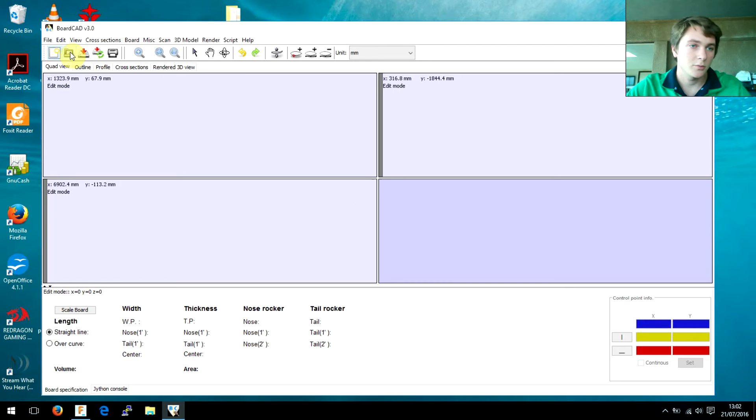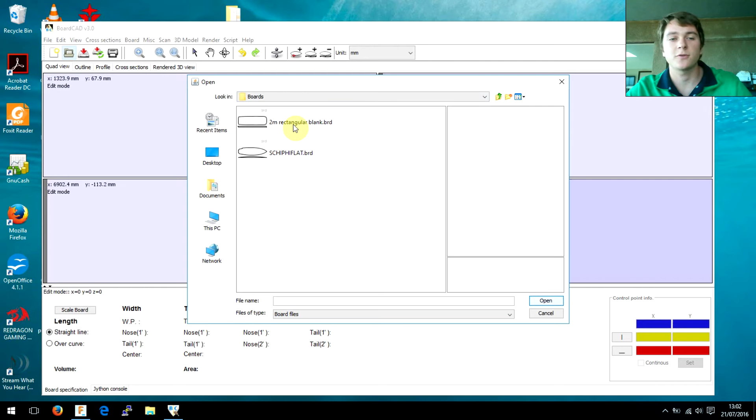Alright, so here I've already created my board, but if you want to create a new one, you could just choose a template, so I'm just going to open mine. Now take note of the open dialog, it's already gone to my boards folder. If in that folder that you're going to has a board file which is supposed to be compatible but not exactly compatible, for instance the Shape3D boards with a fin box wouldn't open in Boardcad. Also, if there's a corrupted file, it would also freeze the open dialog, or an old Boardcad file or a new Boardcad file. It's quite sensitive to which files you have in your directory, otherwise the open dialog freezes up.

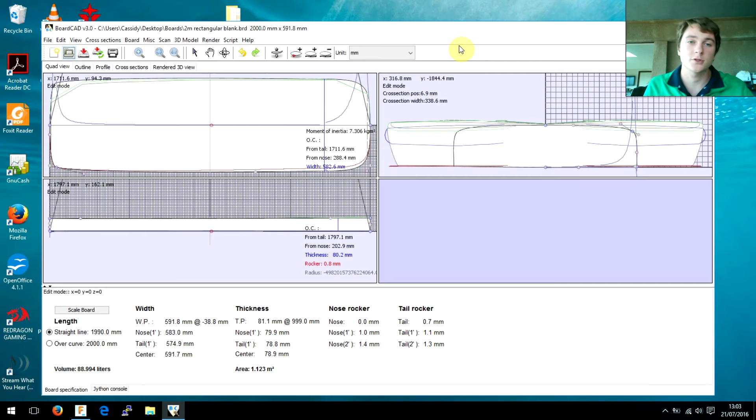Alright, so let's open up our blank. There we go, alright cool. So from here, the first thing we've got to do whenever we import a board is to go to 3D model and create 3D model using Bezier patches. If you've imported a model and it's not looking quite the same as it did last time you did it, it's most likely because the 3D model was not converted using Bezier patches. Alright, so now once it's all shaded, what we're going to do is we're going to render it as a NURBS model. There we go, I believe that's rendered as NURBS.

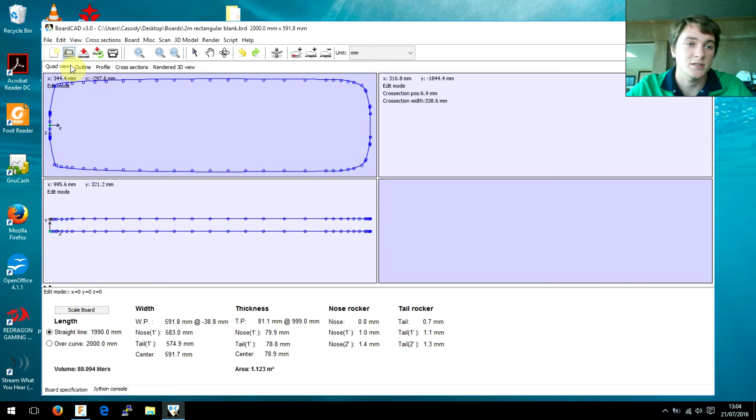Alright, so now we have our blank inside and we need to set it as a blank. So we'll go to 3D model, choose set as blank, and then of course it's very important to right click, view blank. Now if this line is not blue, your board has not been converted to a blank successfully. So now that you've converted it to a blank, we can actually go and import our board file that we want to CNC. So I'll go open, I'll open this board. Just a little bit of background on how the boards are cut that I'm doing is we're cutting it out of just a flat rectangular square blank of extruded polystyrene.

So what we do is we flatten the board out, or design it in a flattened way, and then we press it into its own rocker. Also, our blanks do not have any stringers, which makes the cutting process a little bit simpler.

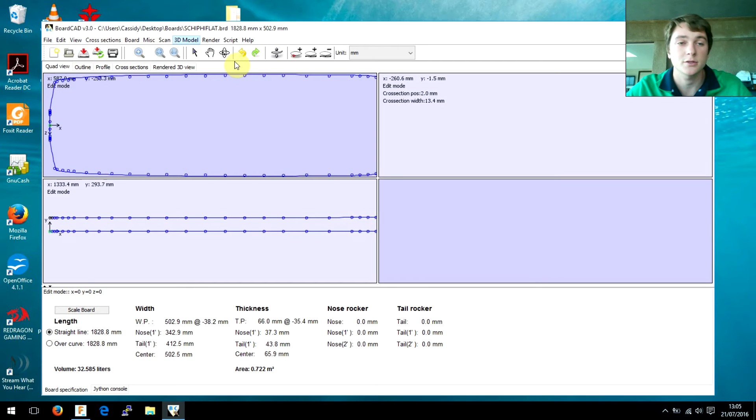Alright, so I imported the board, but you can't see it, so that's a little bit misleading. The reason why we can't see it is because it has not been created into a 3D model using Bezier patches. Once we convert it to a 3D model with Bezier patches, if the block is indented or highlighted, it means the program is loading, taking its time to process the board. There we go, our board's in.

Brilliant. So now we need to shift our board a little bit in the blank so it seems more reasonable. What we'll do is translate X, which is the length of the board. Let's make it 25 millimeters. There we go, you can see the whole board is shifted that way. It takes a while to respond in this window.

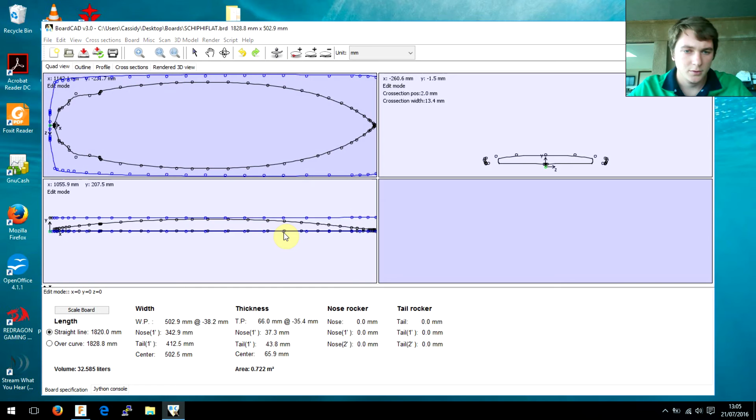And then of course we want to shift it up a little bit higher in this block. So we'll go to 3D model, translate Y. Y is the thickness of the board in the modeling. Shift it 5 millimeters. Oh, maybe not enough, let's do it again. 5 millimeters. There we go, now it seems to be quite comfortably fitting inside our blank.

Alright, and then we can also just render the NURBS model. Alright, that's not all. What we need to do is change quite a few parameters in our shapebot.properties file.

So we'll head over to our local disk, go to Program Files x86, or if you're on a 32-bit system, it'll just be normal Program Files. Alright, find Boardcad.

But before we go into Boardcad, because we're inside system files, you need administrative privileges. So we'll right click on Boardcad, go to Properties, and edit some permissions here. Just click edit, and allow everything for everybody. All users, we allow everything. System, everything's allowed. Owner, allow all. I'm not exactly too sure everything I'm doing here, but I just want to click apply.

Okay, cool, so our settings have been changed there. We're now allowed to change files, move files, create new files, and edit files.

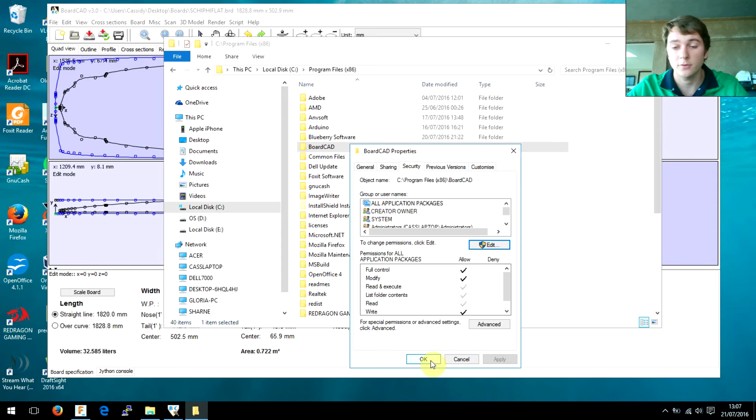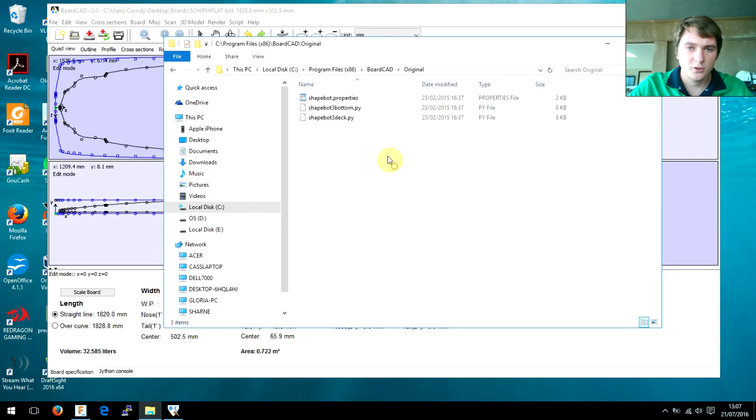Alright, cool, so the files we're looking for are at the bottom: shapebot.properties, shapebot3bottom.py, and shapebot3 deck. We're going to copy these to a new folder, so we'll create a new folder and name it 'original.' Alright, I've already copied my files there, so just paste it there so that you have a backup if you mess up.

Alright, so we'll go into shapebot.properties, and the preferred program I use to open it with is WordPad. Notepad works, but it's a little bit more comfortable in WordPad.

Alright, so here we have our things that we need to change. The first thing we need to change is shapebot 5 deck. That 5 stands for a 5-axis CNC machine. What we're going to use is a 3-axis CNC machine, so we'll change that to 3, and this one to 3 as well. Of course these names need to match the file over here identically. Alright, so that's changed.

Alright, the number of cuts, these you could modify to your preference of the board - how many deck cuts, rail cuts. The rail angle is quite an interesting one - I think it's the angle at which Boardcad recognizes your board as being the rail. So if it's flat, then it's not a rail. If it approaches a 60-degree angle, it would consider it as a rail. That's what I believe it is.

And then speed for cutting a board, change these to reasonable settings. They're all in millimeters per minute. A speed reasonable for our machine, I'd say, is about 6,000. It all depends on your machine.

Alright, extra parameters, cut stringer. If that's a 1, it means it's going to cut the stringer, which is usually made out of wood, so it needs to move slower - that's why we have the stringer speed over here. But of course, if you want to avoid cutting the stringer completely, you could change that 1 to a 0. So it's just some Boolean logic, 1 is yes, 0 is no. I'll just leave it at 1.

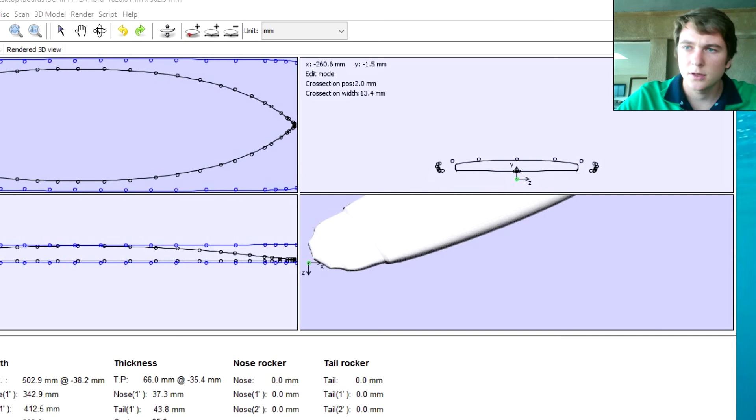Now when we get to the machine settings in BoardCAD, there's a pretty cool diagram here. BoardCAD expects the board to be placed on 2 supports and an end stop. I could also show a picture I made using another CAD program of what it pretty much expects. It expects 4 pucks to place your board on top, and then an end stop to zero your board against, so that it's correctly aligned.

Of course you could use whatever you want to anchor it onto those pucks. The pucks are there just for reference, because you've got an oddly shaped item that you need to place and then turn around as well to cut the other side. The pucks seem to be the most acceptable.

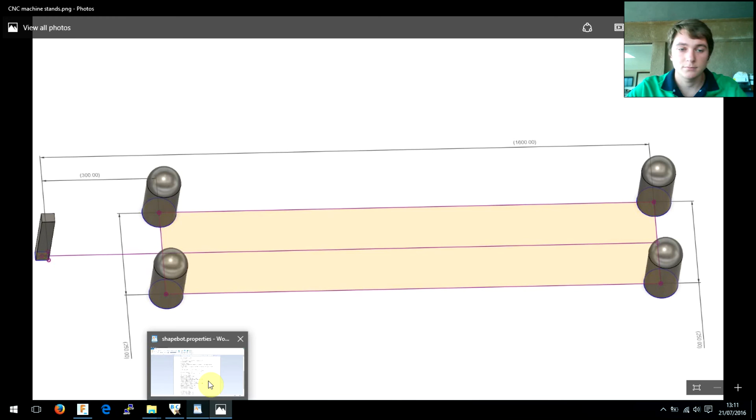Machine support end X - this would be your datum position for the board's tail end, 0 point. I just set that as 0 because I datum my board at the 0 point. So that would be this position right over here - 0 in height, 0 in width, and 0 in length.

The distance for support 1 is the distance from your end stop to the first support. I've got 300 here, so let's change to 300. The width between the supports, this dimension, speaks for itself - I think that was 250.

The height is the height of your puck above your 0 position. I like to keep my 0 positions at the same height, so that would be at 0 as well because it's at the same level.

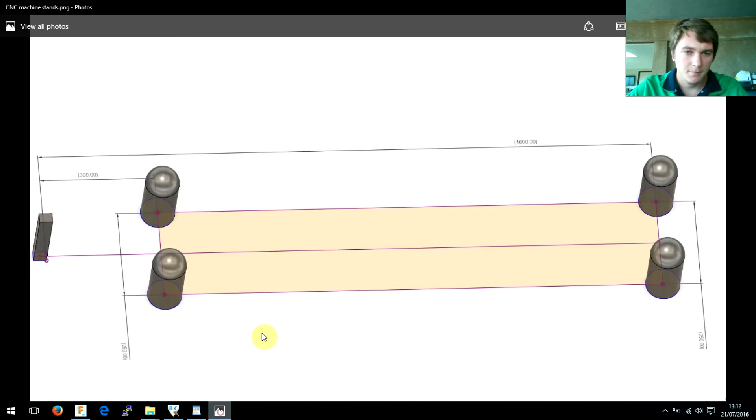Radius depends on the curvature of the dome of your puck. You could have a positive dome, or a negative dome that rolls in a socket. I've got a diameter of 90 millimeters, so I'll change that to 45, which is the radius of that diameter.

Support 2 distance is the distance from the end to the next support, not from the first support to that support. That would go to, I think, 1,600 - really depends on your machine. Width between the support is 250.

Height of the second support is the same as the first support, so I'll put it at 0. The radius is also the same because I'm using the same style of puck, so that would be 45.

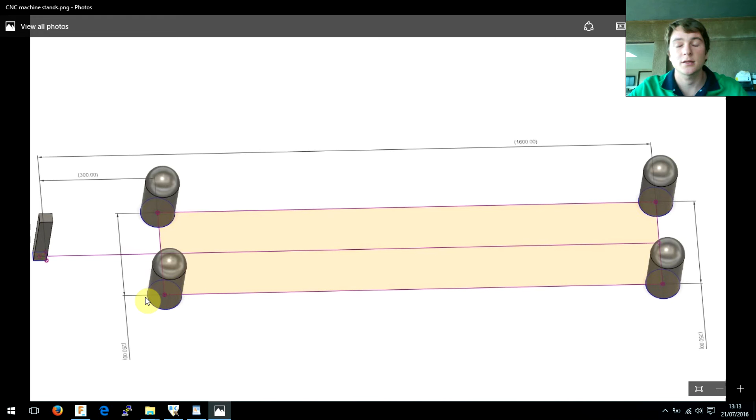These axes I have not managed to successfully change without totally confusing my machine code, so just leave them as is. If you're designing or setting up your machine, it's best to have your firmware recognize the length of the board as the x-axis, the width of the board as the y-axis, and the depth/thickness of the board as the z-axis.

Leave that as that. Scanner settings we can leave, 4 and 5 axis settings we can also leave. These are pretty much dependent on your machine setup, whether it's for a longboard, shortboard, or stand-up paddle board, so you'd obviously be changing these a little bit to accommodate different board sizes.

The deck cuts is how many deck cuts there are over the width of the board. For a bigger, wider board, you'd add more, and also for a thicker rail you'd add more. Very much depends on the resolution you want with your cuts, and also your cutter's diameter, which we're going to set over here.

Take note that this STL has to be in the STL ASCII format, not the binary format.

Everything after the hash is all comments, so the program doesn't recognize any of it as a command.

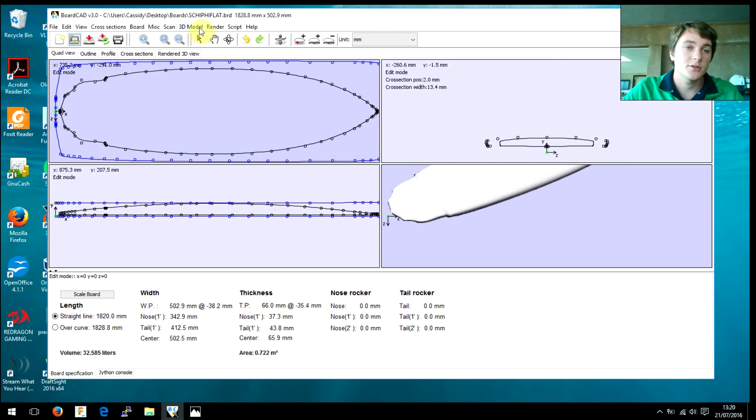The next step in BoardCAD is to make sure that our blank is positioned on our pucks correctly. We need to go to 3D model, then transform, and use the command Place Blank. It's indented there, meaning it's working - it doesn't show a working bar anywhere, so that's your indication. When you place your board down for the first time, you place the blank.

Later we'll flip the board and place board instead, because it's now cutting on the board surface, not the blank surface, as most of the blank has been cut away. Now it's been placed - because it's at 0, it's still in line with our 0 origin point over here, so it's aligned our blank, the blue line, onto our pucks. If you have a bit of a rocker, it'll adjust and place it down correctly. Now our blank is placed, and our board is still inside our blank.

Now we're going to generate our first G-code. So we go to File, G-code, and then NURBS to Gcode deck, because that's our first file we want to cut out now. Take note, my board is flattened out on the bottom rocker, so that's why it looks a little bit funny.

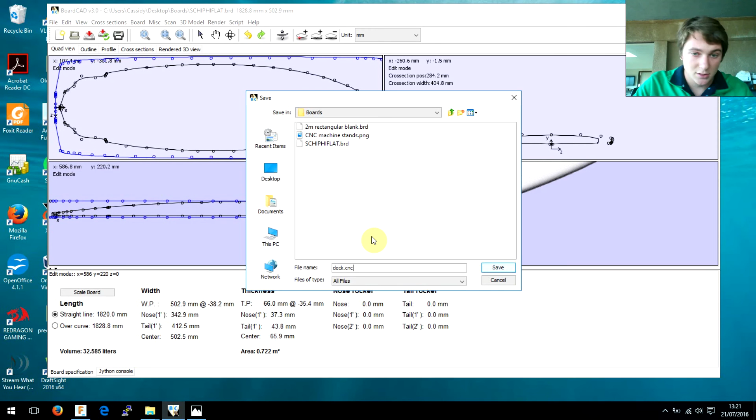We choose our file we want to save it, so we'll save it as deck.nc, or text, or CNC, whichever extension your Gcode interpreter uses. So I'll just go with NC. Alright, now wait for a moment, it's going to give us a dialog. Finish Gcode generation. Okay, now we want to see what the Gcode looks like.

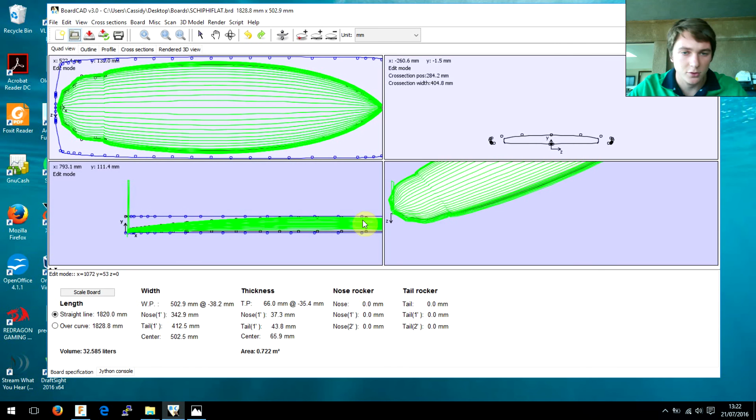So we go right click again, view deck toolpath, and there we go. Now we can see our board has generated quite a nice toolpath here. And then on the side it's also important to have a look to make sure that it's retracting above the board and it's not doing any passes going through the board. So that looks quite good.

There we go, you can see it has a little bit of a quick turn there, but it's just because of the shape of the board. Obviously, you'd actually want to slow your machine down if you've got a lot of complicated curves for your machine to cut.

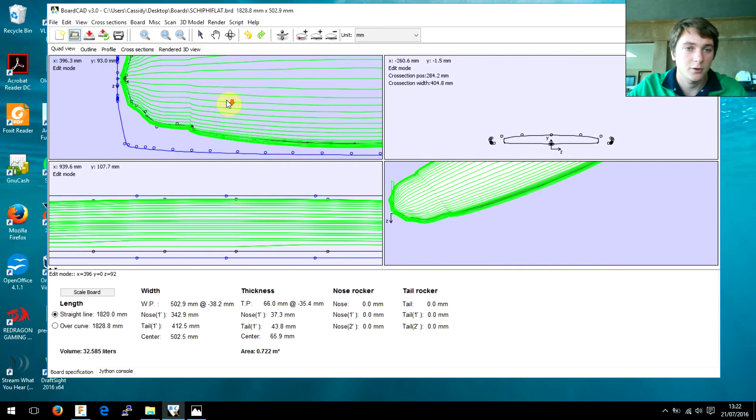So we'd go back to the shapebot.properties file to set a more appropriate speed also for the profile of your board. If it's got very jagged lines, you'd want to run it a little bit slower to avoid it from skipping any steps. And then of course, it looks like we've got a fair amount of passes on the top, so we'll reduce it a little bit, or really depends on your cutters, or maybe let's increase it.

So we'll increase it to about 25, and we'll save the file. Okay, it's used by another program. Alright, so usually Boardcad would not hold on to the program, so let's just try again, see if it would save it. Oh, there we go, now it's saving it. Alright, so sometimes it helps to try again.

We want to add some more deck cuts. We'll add 25 deck cuts, and let's reduce the rail cuts to about 6. Save, and I'm going to show you how you can see the G-code generated again. So save, close, go back to Boardcad.

We'll do exactly the same. G-code, NURBS to Gcode deck. Choose the same file, we save it, wait a while. And of course you could modify your G-code as much as you want in shapebot.properties until it's satisfactory. So click OK, there we go.

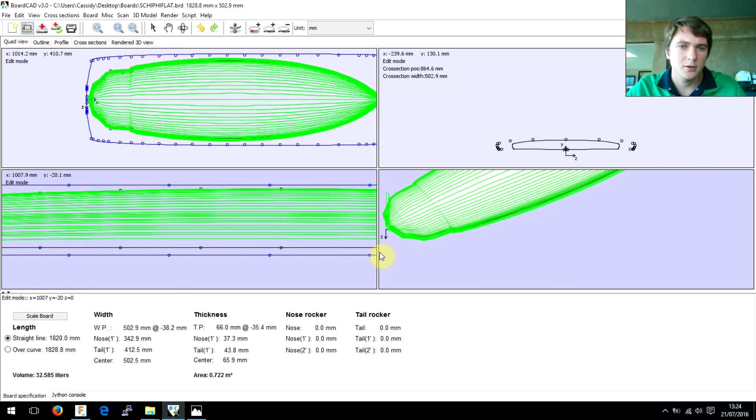You can see it's gotten a little bit denser, but it's also worth noting that it's cutting a very wide path around our stringer over here. But I've noticed it's very dependent on your cutter that you define. This bullnose is a very big diameter, it's 30 millimeters, so usually you'd probably be using a 20 millimeter, or depends on what you could get your hands on. If you've got a good source for nice foam cutters, I'd be very interested, so let me know. At the moment we're using standard spade bits and building our own.

So now let's quickly flip our board and generate G-code for the other side. So what we're going to do now is go to 3D model, transform, flip board. We don't need to flip our blank or move our blank alongside because our top side of the board has already been milled, so we're going to replace it on the top side.

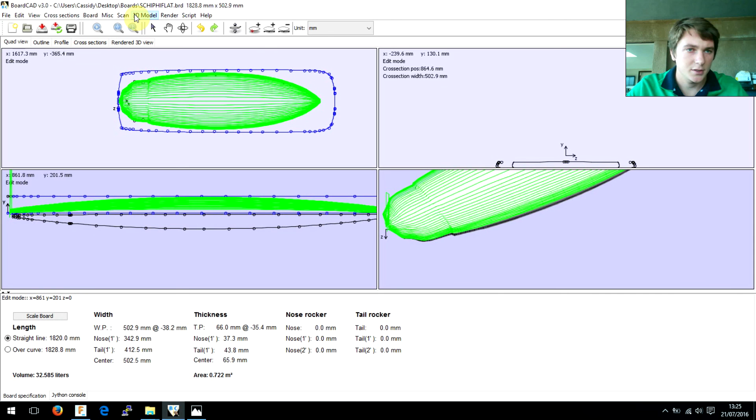So we'll go to 3D model and we will place board. Very important. Alright, taking its time, you can see it's loading. Is it working? And your shapebot.properties - if you're having trouble placing it, one of these settings, certain combinations of these settings could have turned out that your board is not being placed.

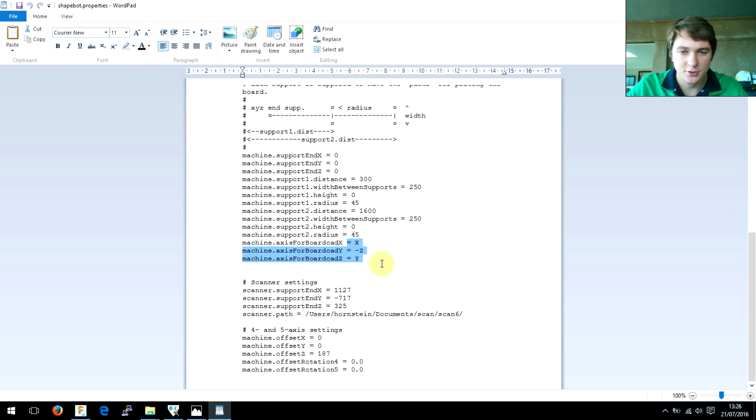And of course your board is being placed on these parameters that we've entered under the machine settings in shapebot.properties. Alright, we can see it's still busy. There we go, we can see it's moved. This point of intersection is most likely our puck position that we've set in shapebot.properties. You can see on this side as well. Alright, so that's pretty much where you're going to have the puck.

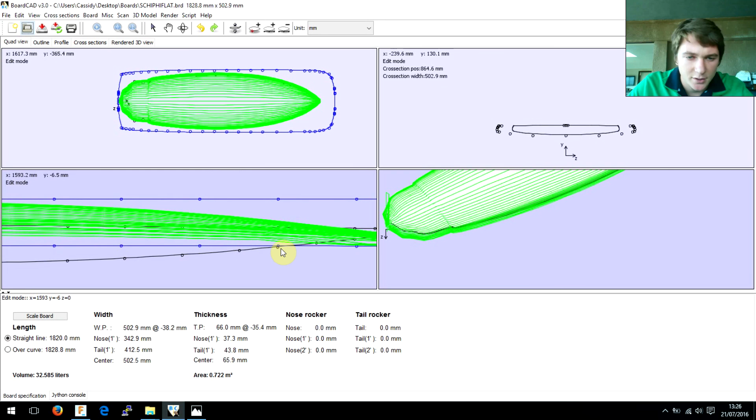Now this Gcode that we see over here looks quite funny, so we'll just go ahead and disable view deck toolpath. And we have not generated bottom toolpath, but we could just select it so that we can view it as soon as we've generated it.

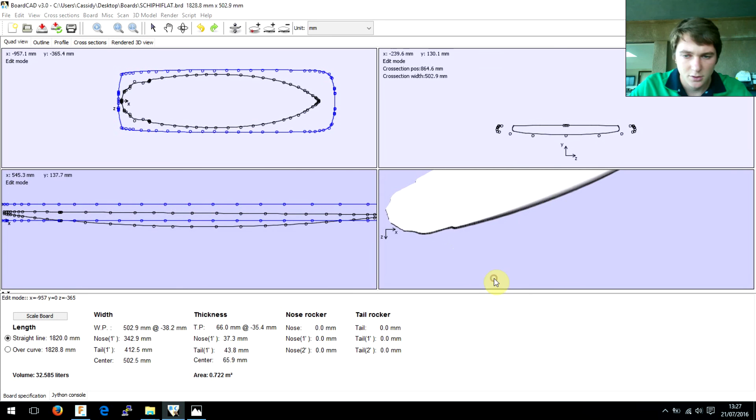So now we do exactly the same. Gcode, NURBS to Gcode, bottom dot NC, pretty much the same format you want to use there. Save it, and 3, 2, 1. Finish Gcode generation. Alright, cool. So that Gcode has also been generated. You can see it runs across.

To have a look at our Gcode in a bit more detail. Alright, looks like it's doing some mildly funny things over here. It's probably just because of the cutter size.

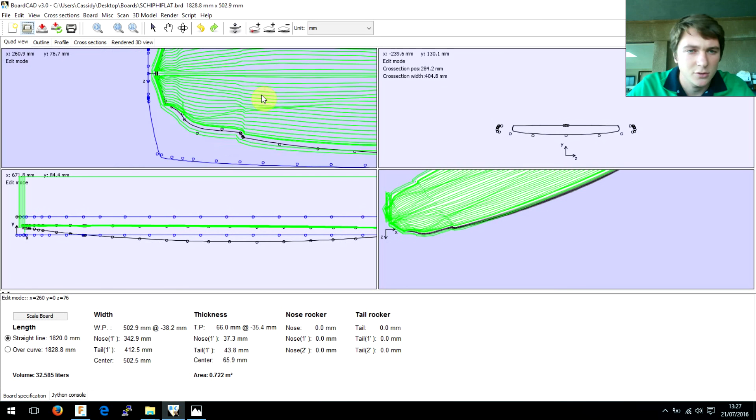But of course, if we change the cutter to a different one, our own STL cutter, we could get better results. Also take note, if you're going to save it, it won't exactly save the same setting with the Gcode and board placement. You're going to have to do it again pretty much. I hope my tutorial's been helpful so far.

As an extra section, I'm going to show you how to create your own cutter. First we want to create an STL file. This STL file we could open in Meshmixer, which is a free software from Autodesk. So creating STL files is also possible. Let's open our bullnose.

And we can have a look how it looks. This is what the cutter looks like that we've just generated our Gcode with. In this program, what you could do is also take a measurement, to have a look at how big this cutter really is, just to get a rough estimate.

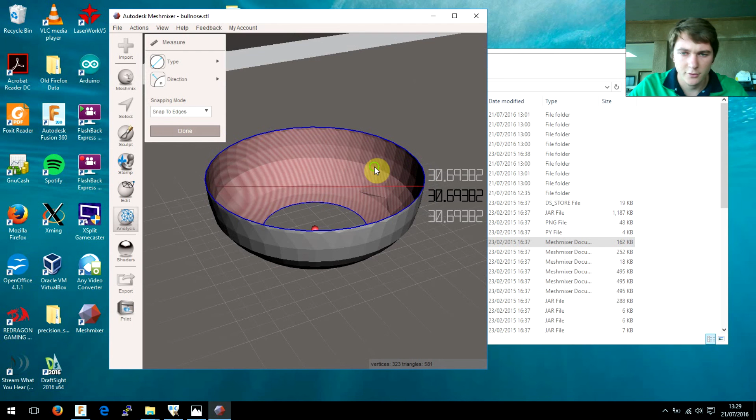There we go, now we can see it's about 30.7, I'd round it off to 31 millimeters. We could also determine our radius by figuring out the dimension down at the bottom. You could use Meshmixer to try and find out what your STL's dimensions are.

To create a cutter, you could probably create a primitive, this looks almost like a cutter. You could learn how to use Meshmixer to create your own cutter, but I just stick to my usual CAD program, which is Autodesk Fusion 360, which is free to hobbyists, and that fits my category.

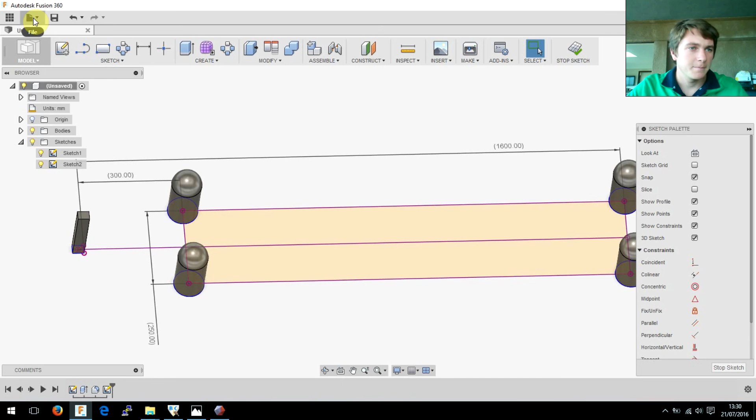So I'm just going to create a new design, and in here I'll create a mock-up of my cutter. I'll create a cylinder, and I believe these axes would give me the correct orientation, so I'll just turn it. Diameter of my cutter is 20 millimeters.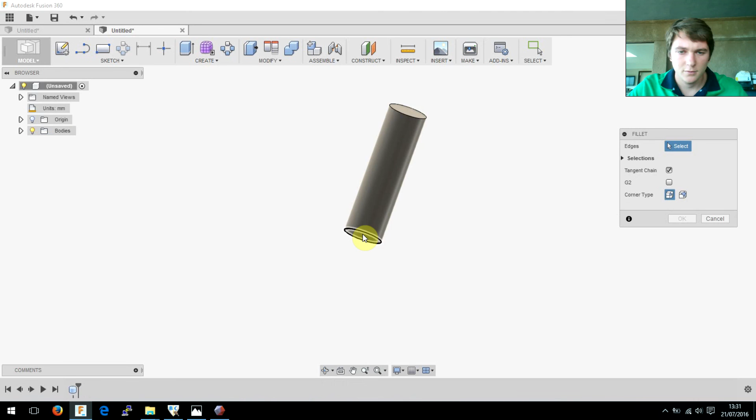I'll extrude it to just make it long enough, and I'll add a fillet to the cutter. That's a bullnose, and I think it has a radius of 4.5. There we go, so that's pretty much what my cutter looks like.

Well, it's that simple. You could also pretty much create almost any shape you want, I believe, but I have not tested the extent of this.

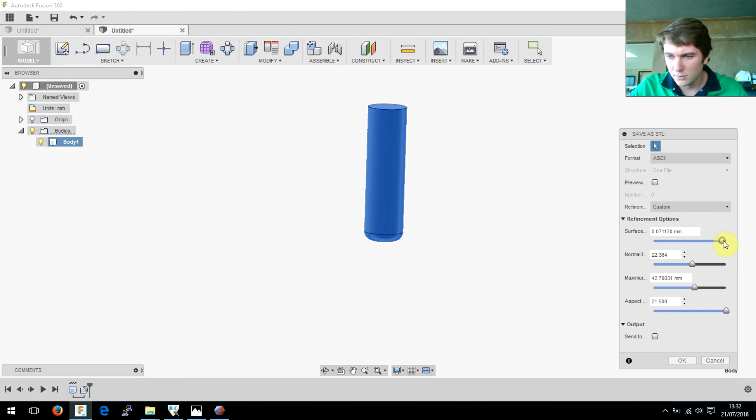So we'll go to body, right click, save as STL, and make sure the format is ASCII, not binary. Binary doesn't work in Boardcad, so we'll choose ASCII. We don't need such a high resolution. STL is very common and used in 3D printers.

Alright, so we'll just save it as our cutter, which is a 20 by 4.5, can't exactly put a point there, 45 millimeter bullnose.stl. Alright, save that, cool.

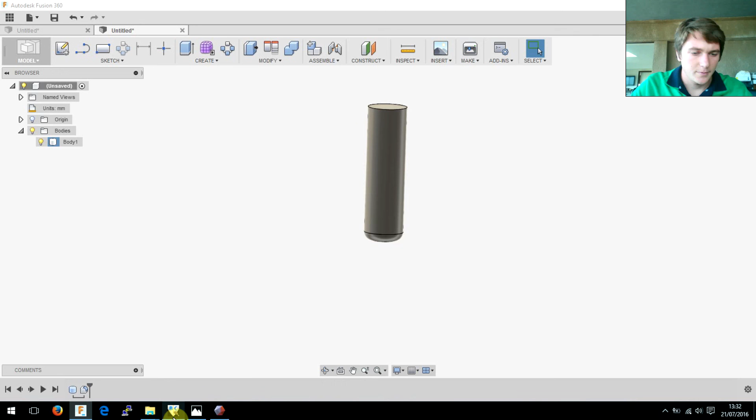And now we can go back to our program files and our board directory. We want to copy this guy, paste it alongside our other cutters. Then in our shapebot.properties,

we want to change the name over here to our bullnose.stl. So the name that we made it was a 20 by 45, so double check, millimeter bullnose.stl, millimeter bullnose.

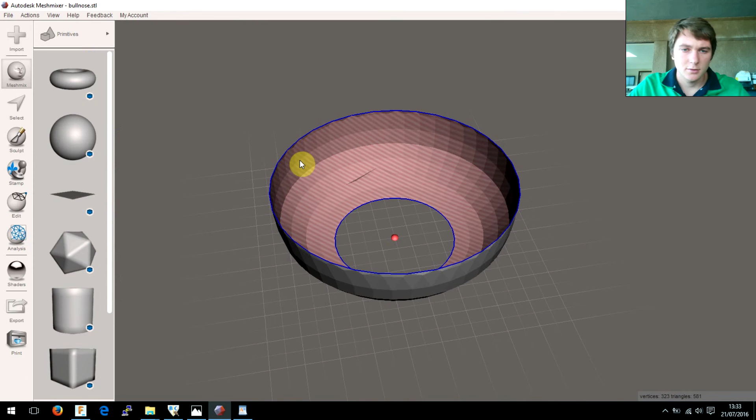There we go. Alright, so that's our cutter that has been created and implemented, but I just need to make sure that my cutter is in the right shape. So just for safety's sake, I'm going to import it alongside

this original cutter just to make sure it's in the correct orientation. So there we go, if you have a look here you can see it's pretty much in the same orientation. If it was sideways, we'd just have to rotate it to make sure it's good, pretty much like the cutter I'm going to use. So that's double checked, and now we can go back to Boardcad and generate our Gcode again.

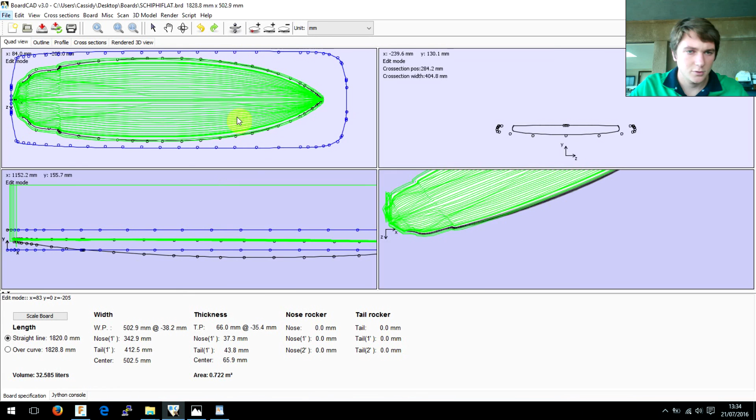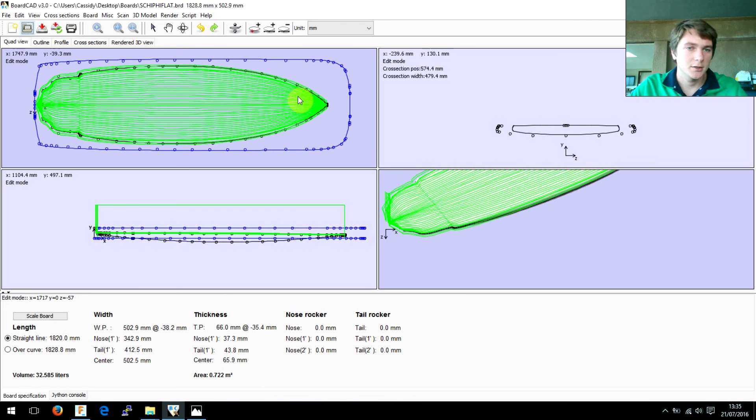Alright, it really depends on the cutter you use. Obviously I've got a much smaller cutter now, so that plays a bit of a role. There we go. So that's how you can use your own cutter in Boardcad and generate Gcode for top and bottom. Make sure you set up your machine correctly, place the board correctly, and then you should have satisfactory results. Thanks for watching, and I hope it helped.